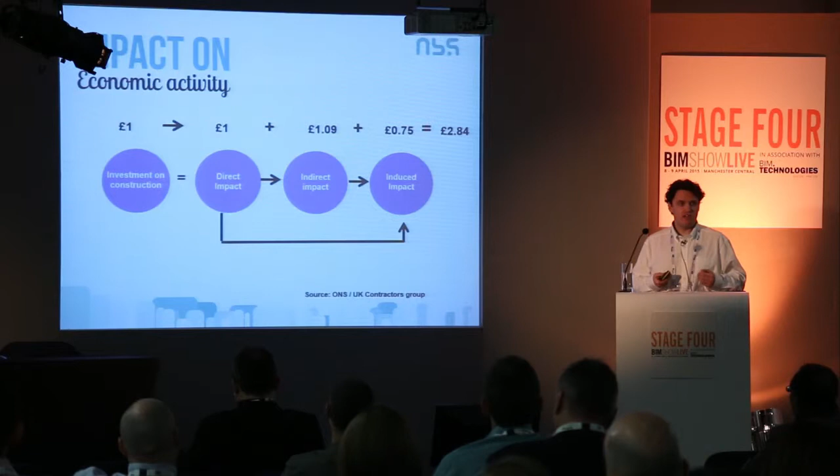So I had a quick scan of that document. We always think of BIM in terms of efficiency and waste and value for money. Efficiency is mentioned 13 times in that document, waste 11, value for money 15. Health and safety doesn't get mentioned once at all in that document.

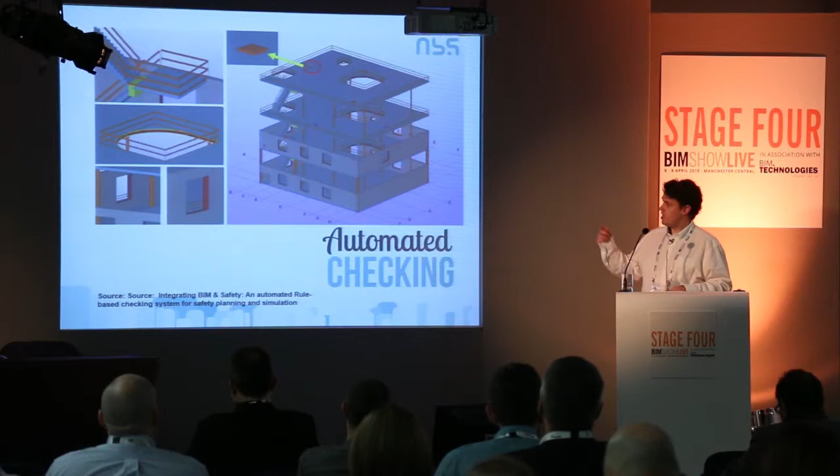So the concept is being able to set up a series of rules that the model will then check to validate information. This was an academic study. You've got a simple square building, and what this is doing is analysing some rule sets that somebody has set up. So in this case, if it detects an aperture of a certain size, it will automatically put a fall arrest system round it. You can get some quantities, you can get some visualisation, and happy days.

But again, there is a caveat to this. When you look at any type of legislation, whether it's building regulations or health and safety, sometimes rules and regulations are black and white - it's either X or it's Y. Other regulations are open to interpretation, so it can get a little bit grey, in terms of how you check it.

But I think with automated checking, you can start to check a lot of mundane tasks. The other point I'd like to make is that this doesn't rectify poor design or anything like this, and it also needs human intervention. David Philp and others talked earlier about automation, and if something can be automated, then it will, but it still needs a human, me and you, as a design professional, to make a judgment call as to what's right and wrong. So are we all going to be out of a job? No, probably not. But this type of stuff will make our jobs easier, I believe.

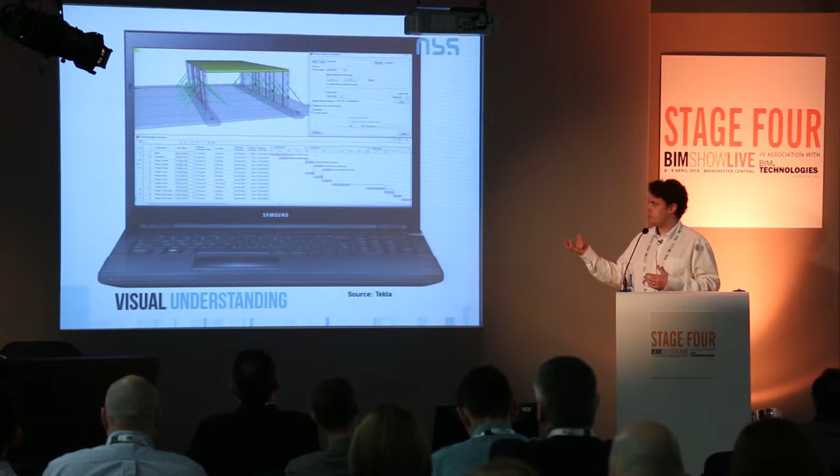In the past, project management tools and CAD tools were two separate things, really. You've got the graphical database and you had this project schedule and time-based software, and they didn't really talk to each other. So I'm sure you've heard 4D, 5D, 6D, whatever.

But now we can start to link up the graphical element with a time-based element, so we can start to see sequencing. So what does that mean for health and safety? Well, it means you can start to plan out and think about - I'll give you a scenario. Say it's a hospital, for example. You've got a big MRI scanner to get into the building. When is the best and safest place in the sequencing to do that? What place am I going to lift it in? Can I get it through the corridor, etc.?

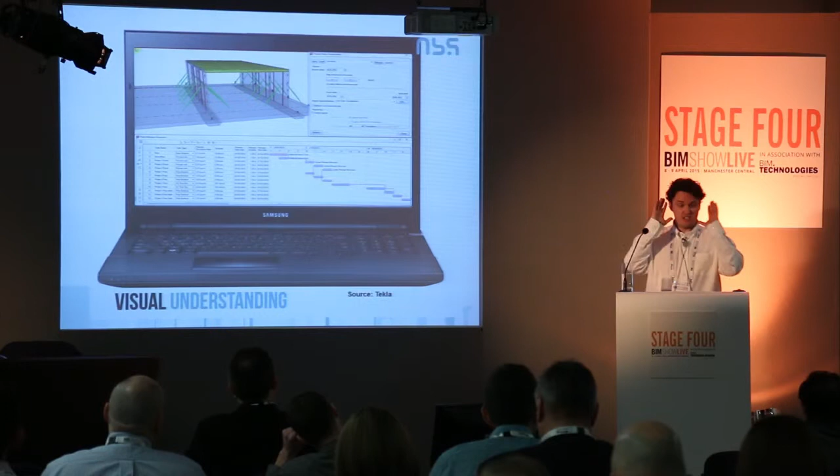Because we've got that time-based element, we can start to also think about clash detection. Now I don't mean clash detection in the magenta pipe going through the yellow pipe and the green pipe and the services. You know, that's the typical image we get, isn't it? Which is good, but I'm thinking about more on-site clashes.

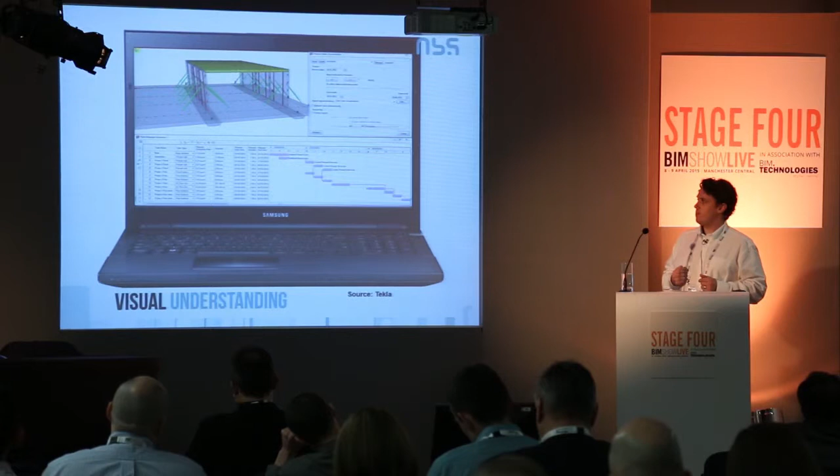Going back to that notion of a lot of people dying by getting hit by things on site, I don't want a lorry load of insulation rocking up at site when the primary school across the road kicks out at the same time. You know, that's just asking for trouble. So we can start to think of clash detection in terms of those parameters.

So you have to use 3D objects, but also site-based objects as well. We tend to think of objects as components and stuff that you can buy, but as a contractor you need to set out your site. Where's the material laying down? How are we going to get stuff in? So you can start thinking.

And they will do some basic validations on that. I don't know to what extent, I do think they are quite basic. And they'll do a 3D walk around before they get to site. But what's quite nice about this, as part of that, they've made a number of these 3D site objects available. Unfortunately they are just in a Revit format. But there's a number of there, but I think that gives us something to think about as well.

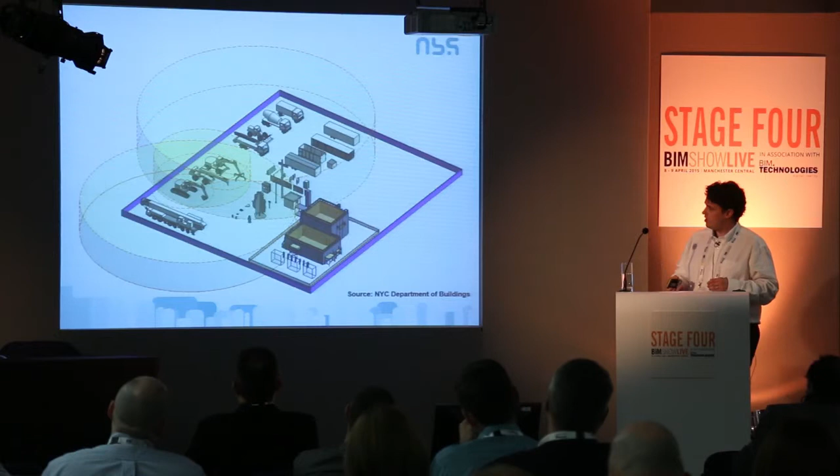So this was given to me by Eurobuild, so we can start to look at zones of no-go areas. So just showing a crane sweep, for example. So we can start to think, actually, you shouldn't be in that area of that building site because that's the sweep of the crane. So we've got some really good tools and techniques.

So we can reenact, reconstruct the environment, see what happened, what can we learn. And as morbid as it sounds, we can also see what would happen if that crane was to go over. So what effect, how far-reaching in the site would it be?

So there's a big 'but' here. That stuff's all good stuff, but it's too late in the process. It's all post-design. This is all contractor stuff.

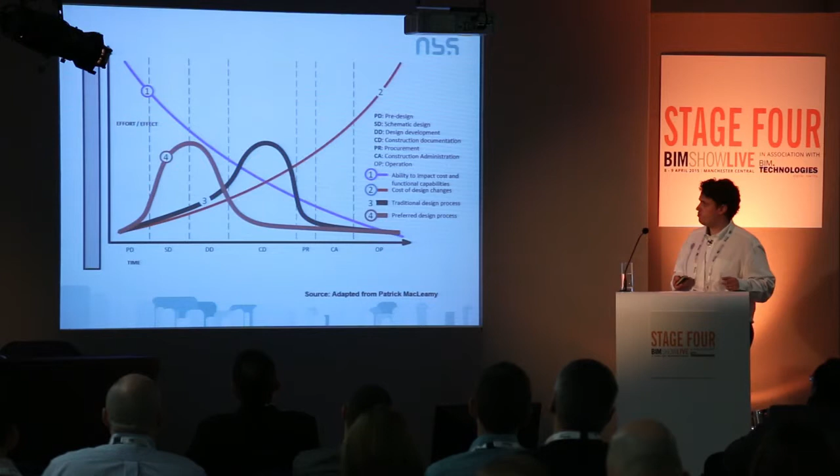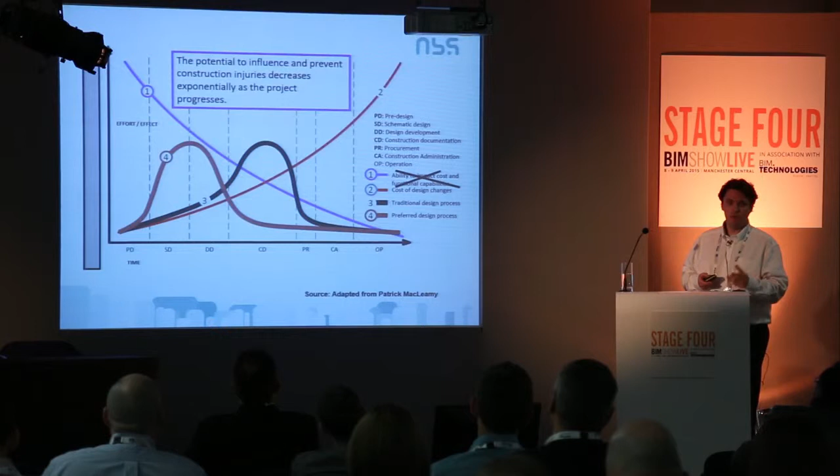I want to turn that on its head. So the potential to influence and prevent construction injuries decreases as well as we go along the project timeline. So what does that mean? We want to be focusing on planning and design stage before we even put a shovel in the ground. That is the most effective form of safety program, starting at planning and pre-construction stage.

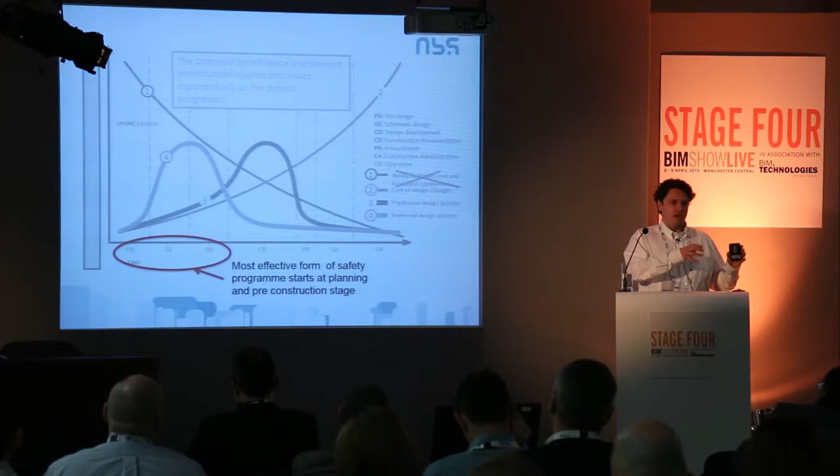I think just going back, what's quite interesting about that, if you go back to Wren, which we started this story off, Wren was probably the architect and master builder as well, so he was thinking about all these things. But over time, professions split, you've got designers, you've got contractors, the designers looking after the health and safety of the design of the building, somebody else looking after health and safety of the occupation, and we're not looking at it in a holistic view. So I think that's another element where BIM can come in.

So now we're going to have a quick look at health and safety information within the BIM process. So we've got information coming from everywhere.

Maybe you're the client, maybe you've procured a building before. We've got existing health and safety files, we've got survey information perhaps, and information coming from the design team, maybe using various British standards or specification documents. But then there's also information coming from the contractor, the supply chain, the trades and the trade union.

So how do we get that information into the model? How do we extract it? How do we get it in a digital form? And how can we make use of it?

So let's start thinking about hazards. There's a number of hazards we can think about: process hazards, like if you're doing a chemical plant. Then activity hazards, how you're going to construct it. Location hazards - a roof isn't inherently dangerous, but when you're 5 meters up constructing it in a high level location, it is dangerous. We've got legislation hazards, building regs, and then emergency hazards as well.

So if something was to happen, how do we actually prepare for that scenario? All of these could relate to a number of things really - they could relate to the owner, to the use of the building, to the construction of the building, or to the design of the building.

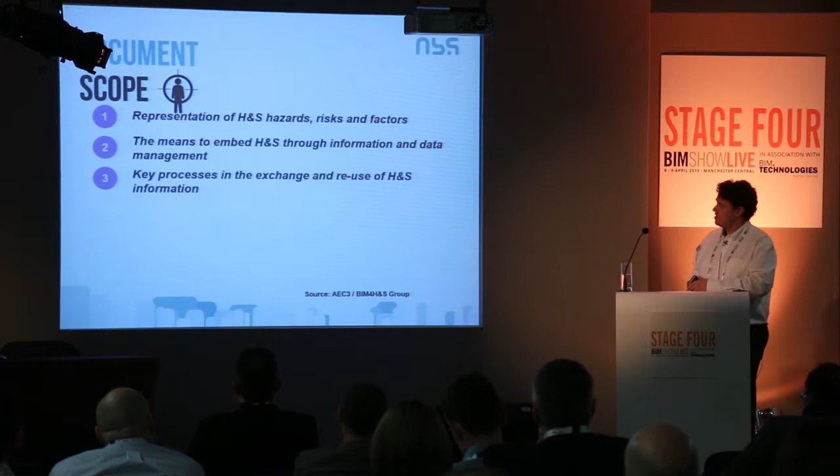So this is potentially the scope of the document. We're going to represent health and safety hazards, risks and factors, and look at how you can embed health and safety information and data. What is the process for that? We need to standardise these. What are the key processes and exchange points? How can we map them, and what are the benefits to cost, program and carbon?

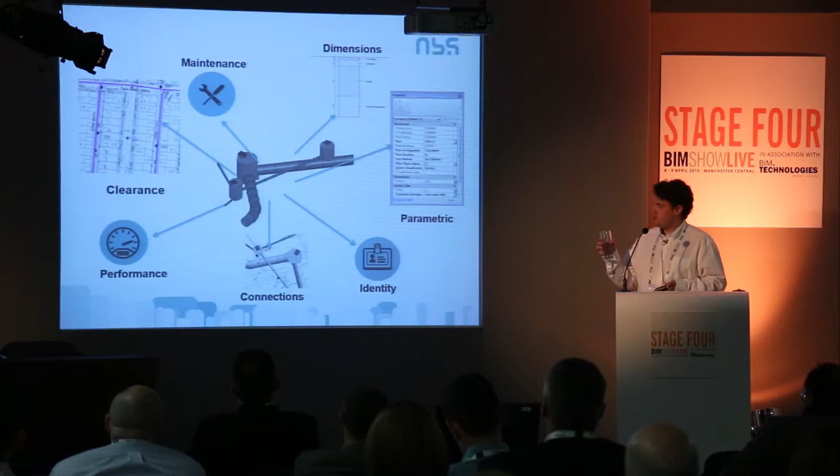So let's just think about an object, a BIM object. I've purposely used one here, so I'm slightly out of my comfort zone. There's a bit of pipework, so I started to think about, well, what is an object? The first thing that comes to mind is geometry and shape, and we've got that, and how that object connects to other things, and the performance and the identity.

So what is that pipe? Has it got a classification? Has it got a name? How can I find it in my model? We've got some code information about the maintenance of that object, we've got some dimensions, but then we can start to think maybe about clearance as well.

So you've got the graphical side of things, and then you've got non-graphical as well. Remember, in these PAS documents, when it talks about a model, it's not just a graphical model - it's a geometrical model, it's got non-graphical information, it's got associated documentation. So this is all the non-graphical stuff, all the attributes and properties. This is where we can put the COBie information, but you can also start to look at hazards and risks.

So let's just look at a data cupboard, for example. I've just taken some standard regulations. We can start to pull out some key information here about that object.

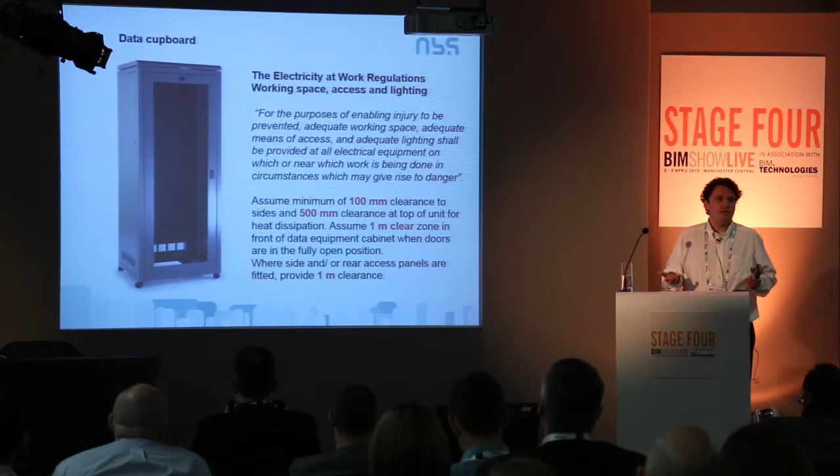If we look at things like government soft landings - remember that BIM is just one piece of that pie of the 20% cost savings. There's other things like lean procurement, there's also government soft landings. And government soft landings is all about getting early contractor involvement. It's also about thinking about health and safety and how you're going to use that facility from an early stage. So at a concept stage, we can start to think about these objects and how we're going to maintain them. How much space do we need to get in to access them?

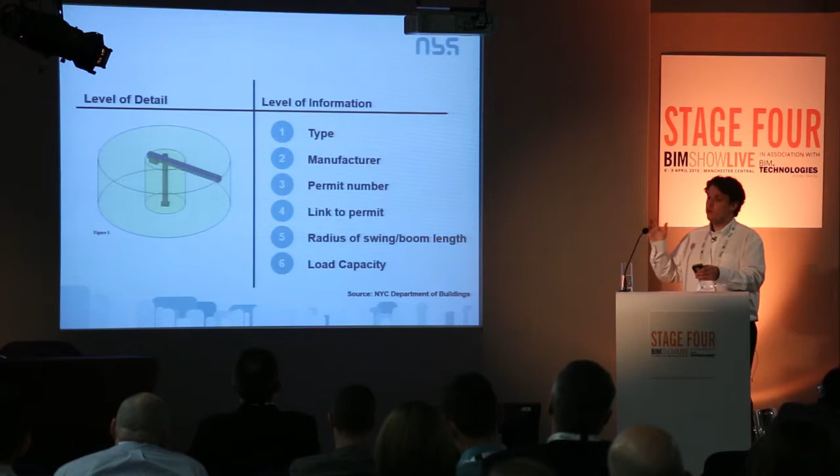Then we look at that non-graphical information. We can start to think about the type of the crane, the manufacturer, permit - all cranes need a permit. We can put hyperlinks to that permit. So we can start to think of all this information.

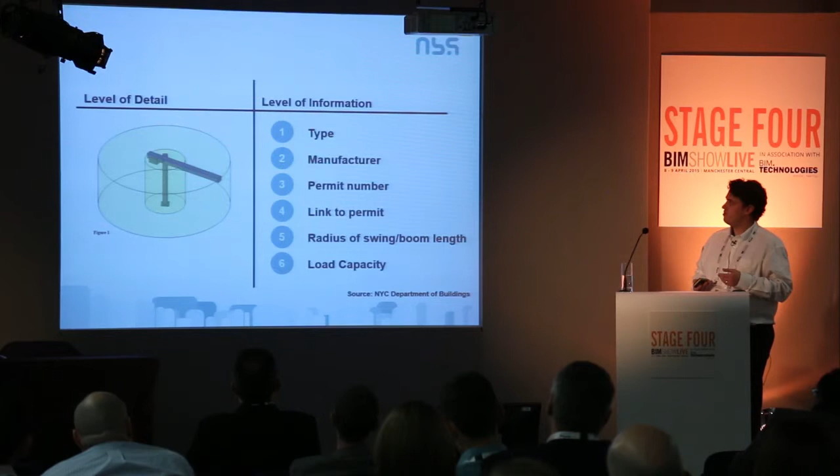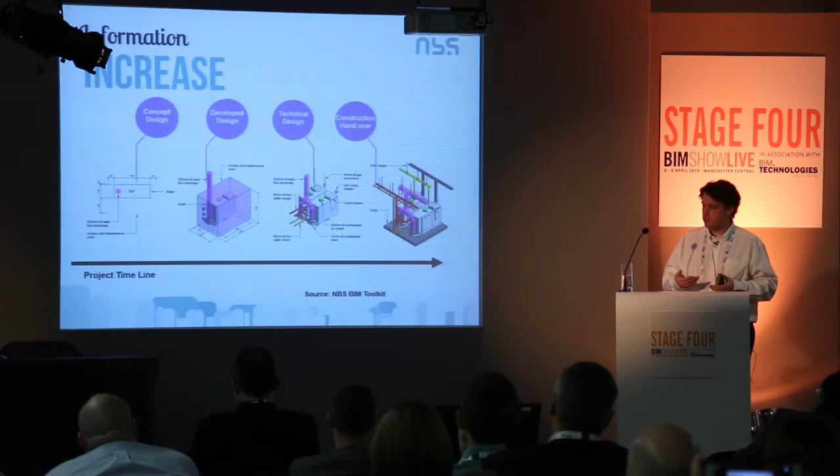And health and safety information is an increase - we don't just think about everything at once, Rome wasn't built in a day, so we think about these things gradually. From a concept design, here's just a boiler. So at develop design, we can start to think about space requirements. And as you go through to technical and construction handover, you can start to think about more detailed requirements and the documentation and O&M manuals and all that type of stuff.

So I had a little stab at some COBie data drops - what type of things should we be considering? So stage 0, this is kind of the strategic briefing stage, where you're probably identifying health and safety risks and hazards, maybe preparing an initial draft pre-construction information. You're looking to the client - has he got any existing information or documents that you can look at?

At stage 1 and 2, you're kind of in your concept stage, so you want to start reviewing any contents of the existing health and safety files that you've got.

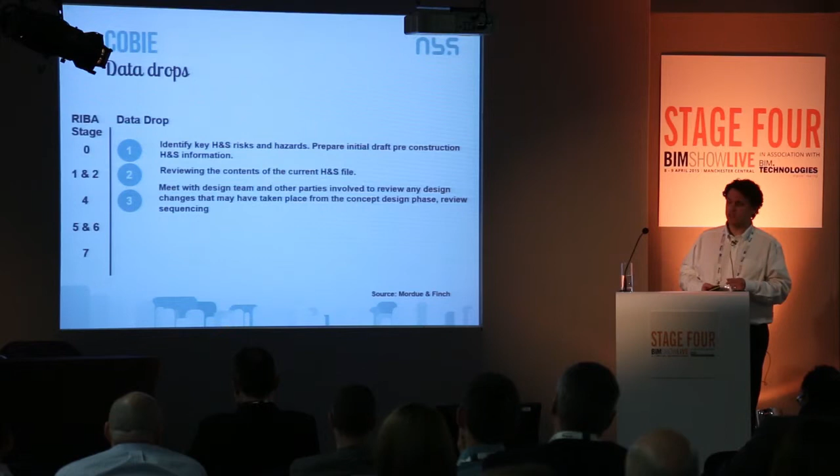Stage 4, you want to be meeting with the design team, reviewing any design changes that's happened, particularly from when you've moved from a concept to a design and development stage. You want to start reviewing that sequencing.

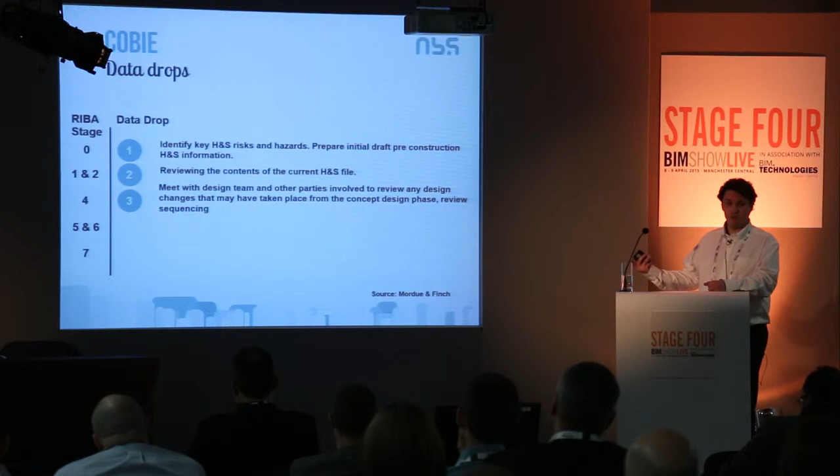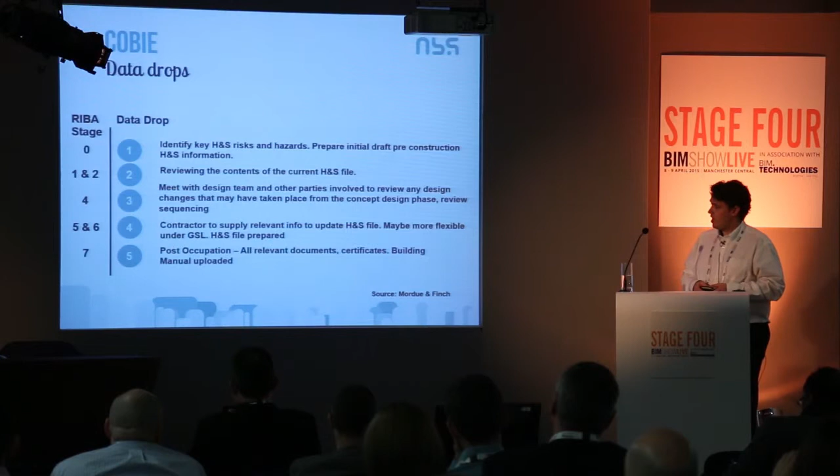And then 5 and 6, contractor supply relevant information. So we've got lots of products coming from the supply chain. We need to get their information early, preferably in a digital format. And then in 7, post-occupation, we need all the relevant documents, certifications, certificates, and manuals, and all that type of stuff.

So when we think about an object, not all that information has to live in the object. Think of an object as a placeholder. Now, we've got information that lives in the object, we've got hyperlinks to other things, and that's perfectly fine.

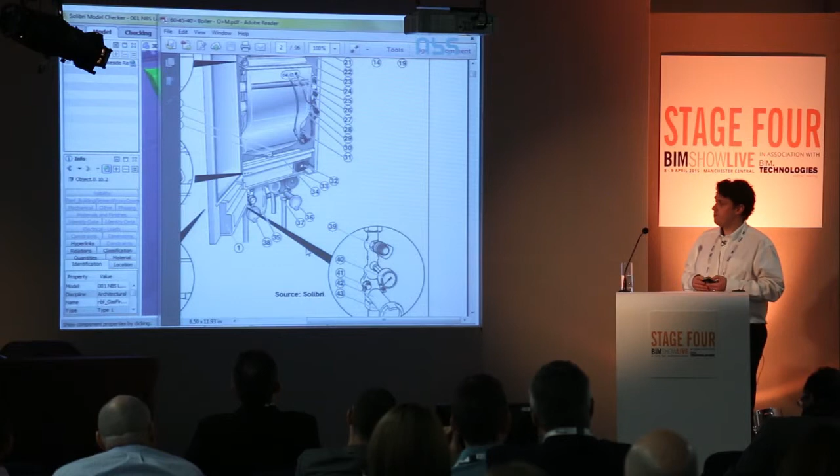So here's an example of a boiler. Within that object, there's some sort of hyperlink that links to the O&M manual for that. Now, sometimes there's a good reason to actually link to an external database or manufacturer's database, because it's probably more likely to be up to date. So yes, it doesn't all have to live in the object.

So finally moving on to the last bit, how do we record and present some of these hazards and risks? Here's a very, very simple example. This was given to me by Casey Rutland at Arup Associates. And they started to consider things such as asbestos.

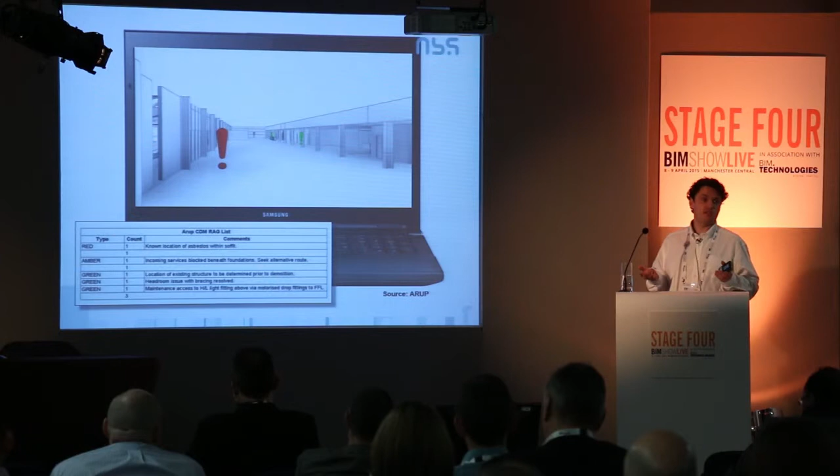And they used a simple exclamation mark using traffic signal, red, amber, green. Everybody's familiar with what those mean. But because it's a 3D object, they can start to schedule information from that. And however you slice and dice that model, it's always going to be there.

So I'll take a sectional cut of this model, and it's there. I can do an elevation, it's there. So it's great. The guy who's actually going to be working on this and needs to know where the asbestos is, can see it clearly, it's communicated clearly.

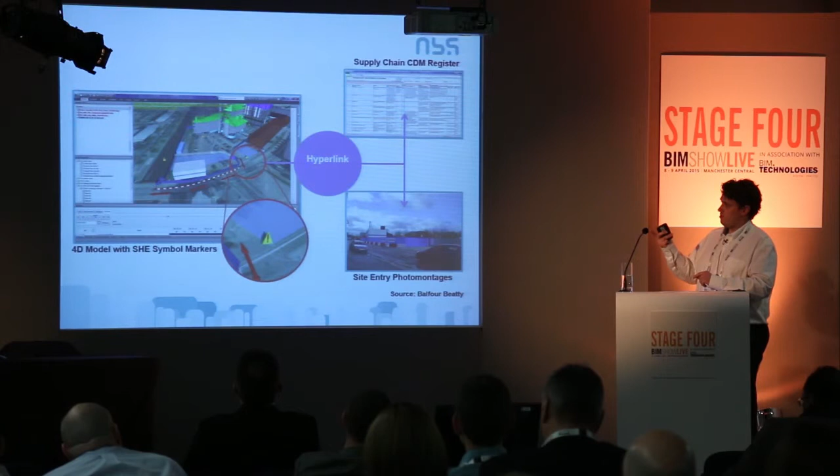symbol markers. And if you click on the marker, you've got a little photo montage and what it's going to look like. And you've got the CDM register. So we can start to link all this information up.

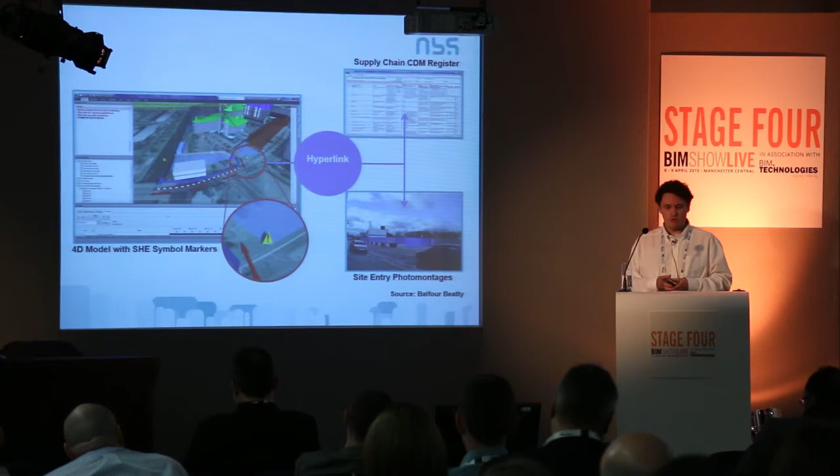Risk can take all sorts of things. It could be a business risk, it could be an insurance risk, but there is a category there for health and safety risk as well. So that's a way in which we can record that.

COBie, I know we've had lots of fun debate about COBie today, but COBie has an issues tab on that. I'm not saying COBie's perfect, but it's a form that we can all use and transfer information. So why not use it as a risk register to start logging information?

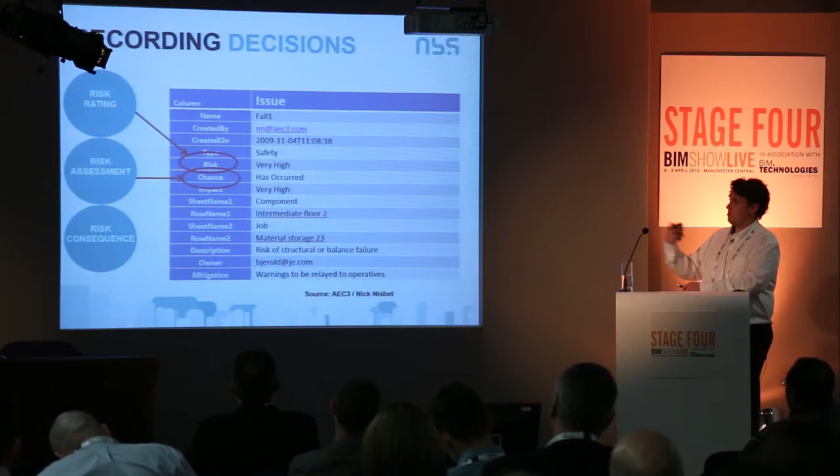So we can attach this to an object, we can have a risk. Is it high, very high? We can make an assessment. What's the chance? What's going to happen if that risk actually happens? And we can link to other bits of information.

So we're starting to digitize this information, put it in databases so we can extract it and filter it and use it for other means. So how do we move away from these big lever arch files?

Think about who the information is for. Think about facilities management for a moment. Is it going to the contractor? Have you got a dedicated FM manager who's probably a construction professional? Or is that facilities manager a caretaker who may not have construction experience but needs to extract information from the model to go and replace the door?